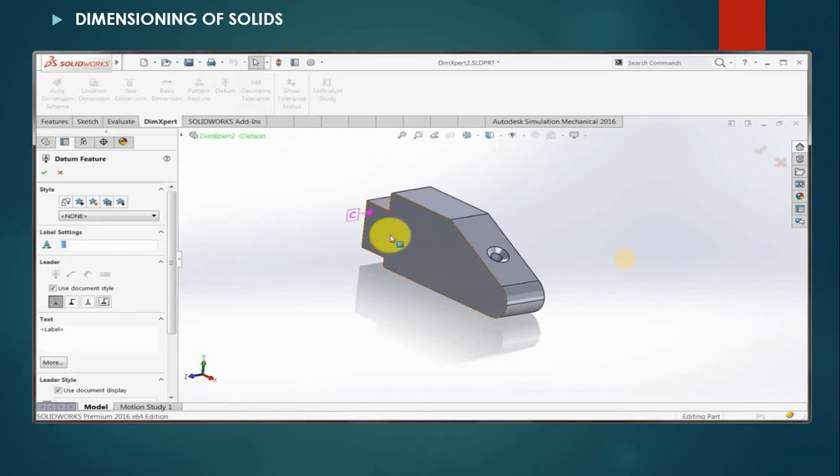What I'm going to do is add some dimensions and features here. I'll start with the size dimension, because I'd like to extract the size of this hole. Before I do that, I'm going to lay out a couple of datums. I know this is going to be my datum page, so I'll place that in there — you can see it's C, I should have changed it but I'll go back and change it. And I'm going to make the top face here — let's just make it B.

I'm going to make the bottom face be my B datum. So we'll change that, and I'm going to update the C here. I'm just going to click it and go into the properties. I'm going to press A, and we can see it.

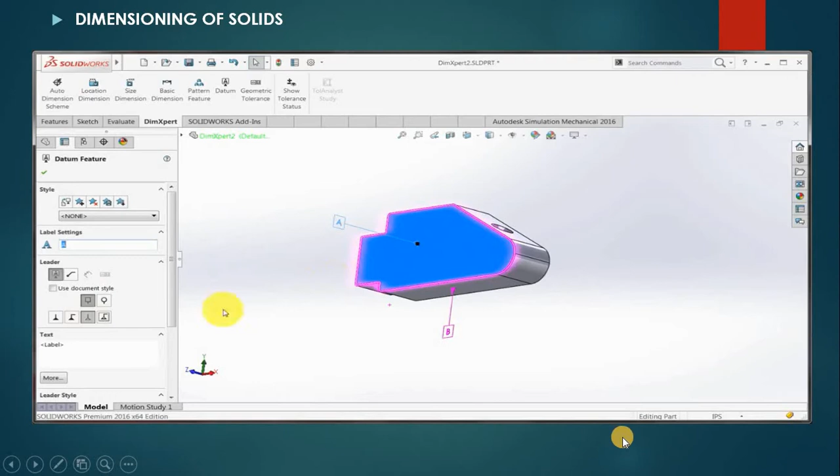Notice I do have some options here. I can adjust the label, I can use the style here. I'm going to do a triangle type leader there. So there are some different options to choose from as I'm placing it.

Now that I've got my datums identified, I'm going to go to my size dimension here. I'm going to select this hole. It doesn't really matter where I select it, but it's actually extracting out information about it. It recognizes the hole, applies my default tolerances, and you can see it's gone through and applied it.

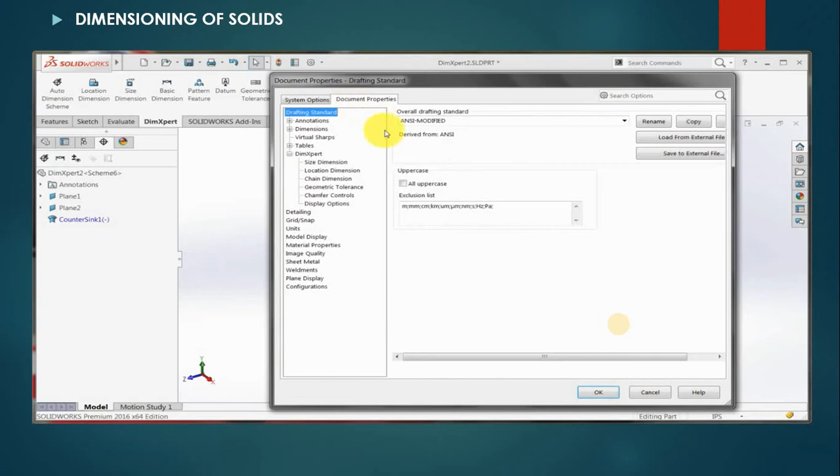Now let's just delete that - I selected it and hit the delete key. I'm going to go into the tools, then options, and switch over to document properties. I'm going to go to DimXpert, and you can see right now it's set up as block tolerance. I can also do it as a general tolerance by default, so you can see how I can change those default methods for when I apply my dimensions.

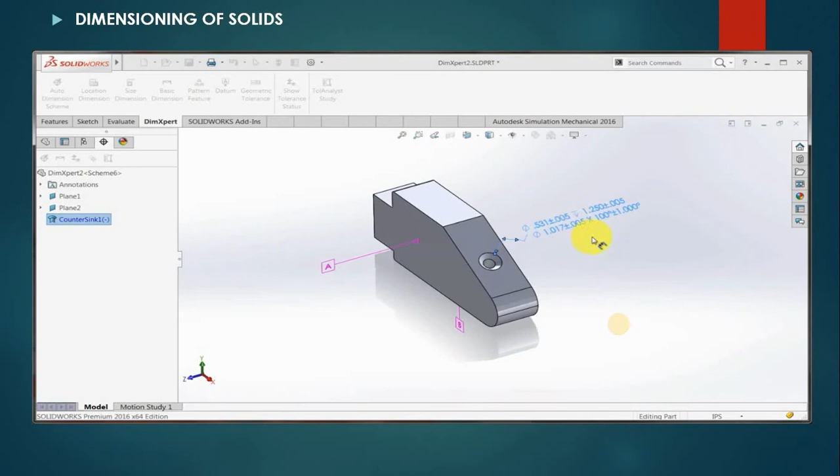Again, I can do my size dimension here, and base that to the model - that's a size dimension. I want to pull out the size of this fillet here, and it is round. Notice the function applies that, and it automatically recognizes that there's actually two the same here, so it's gone through and said there's times 2 here.

If I scroll down here, there's actually a part where I can turn that off - whether to include that instance count information, how many there are. You can go in there and change that. It doesn't change where this is located. Maybe I want this to be after, so I'll go times 2 after, or something like that. You can change that there.

Also notice how I can add other information, and change the overrides and the style of tolerance. So maybe this is symmetrical in this case - I want to have a max style, so I set my max. Okay, so that's the size dimension options.

I'm going to continue on here and place in a location dimension. But what I want to do is actually dimension to the theoretical intersection here. So let's look at this feature toolbar up here, and I want to go to the intersection one.

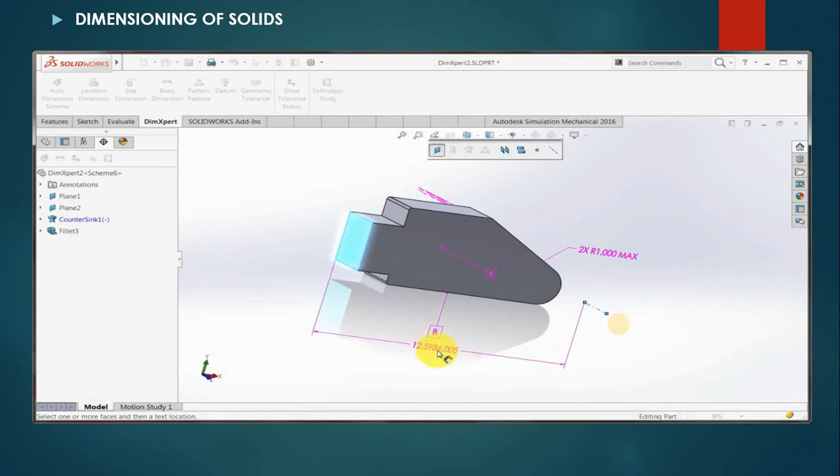So there's my face 1. I'm going to pick the bottom face here, and click OK, and it's actually generated an axis for me. Now I can use that axis to dimensionally locate that face, and we can see that it's pulling out that dimension.

I just want to make sure I have both faces dimensioned. So I'm just going to hold down the shift key and select both of these dimensions, right click on it, and do a combine dimension. Now you can see that it's times 2, which is actually 2 faces there.

So, I don't really want to show it as 2 dimensions. I'm just going to come down to my drop down here and turn off the instance to locate that.

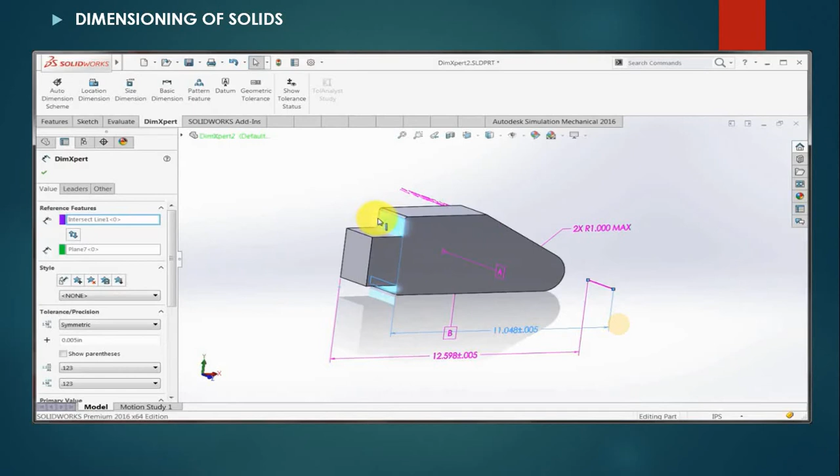Now, kind of a problem - not really a problem, but we can see that this dimension is in the front and this dimension is in the back. So I'm just going to take this dimension, drag it, and snap it to the back edge there. Now we can see it's dimensioning to the back face, so they're both in the same plane. Maybe I'll drag this one down there just to change the location of that.

So I can take this and actually change where that dimension is given - I'm going to change the plane. Obviously I might want to flip these around - oh, there we go. So you can see that I was able to drag those to the back to change the location.

Now if I wanted this dimension to actually be in a different plane, I can right click on it and use this to change the view that it's on - come in here and change how I want that to be. So maybe I prefer to see that from the top, but notice that the right click menu gives me an option to change that. So I'll actually do that because I want to move that dimension so you can see it.

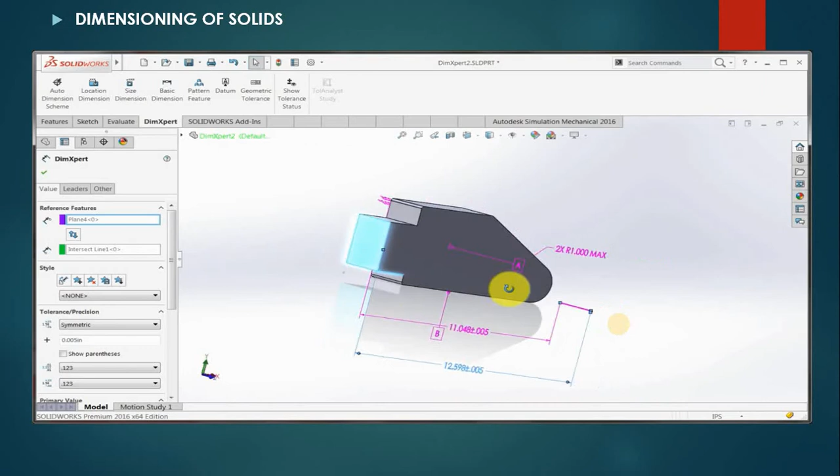So it's back to the back there. Again, we'll take that, drop that. Okay, I'm starting to dimension along here. Everything's starting to look good. I just want to do a quick check to see how I'm doing.

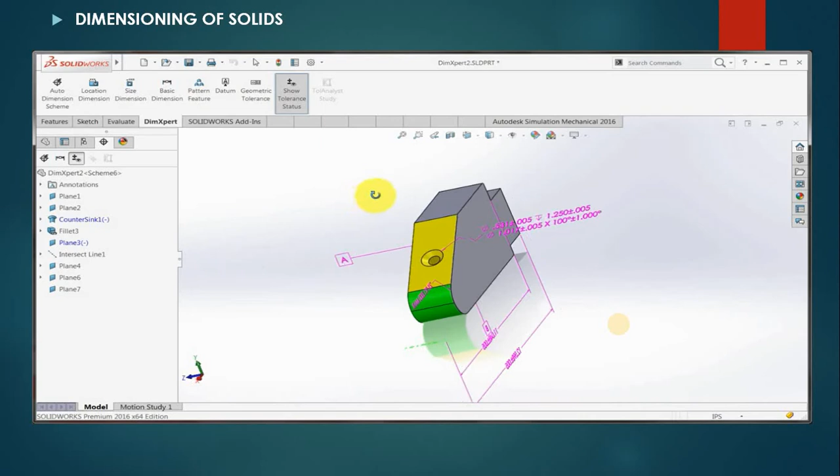Let's come over here. I'm just going to pick my show tolerance status. What it's showing me here is that the green is defined, but the yellow is missing information. So you can see how I've started to define some of the features, but there's some things that are actually missing. What I'd like to do is a location dimension, because I'd like to locate the position of this hole and locate it from the edge. Notice that there's no edge there.

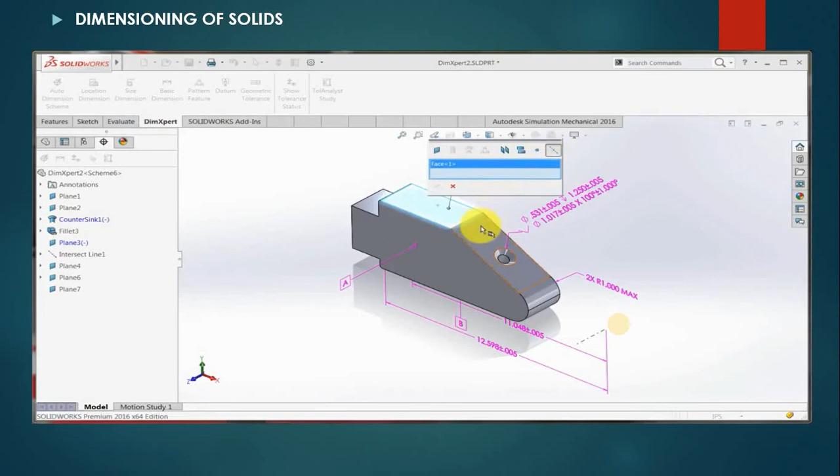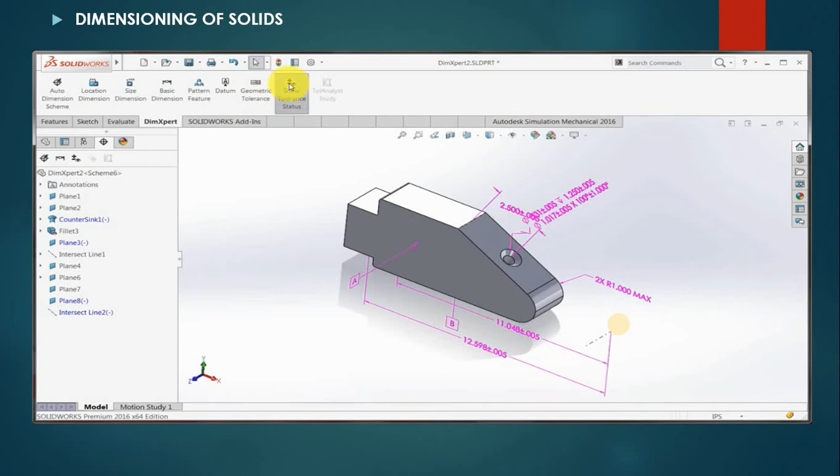So what I'm going to do is a location dimension again. I'm actually going to go to the intersection of those two faces, and dimension that hole and pull out that dimension value to relocate that dimension. See how it's located that dimension. There's one, for example, I probably want to change the plane where that's on. So the idea is that I would continue on dimensioning, and anytime I need, I can go in there and check to see if the features are fully dimensioned, under dimensioned, or over constrained, so I can continue working on that.

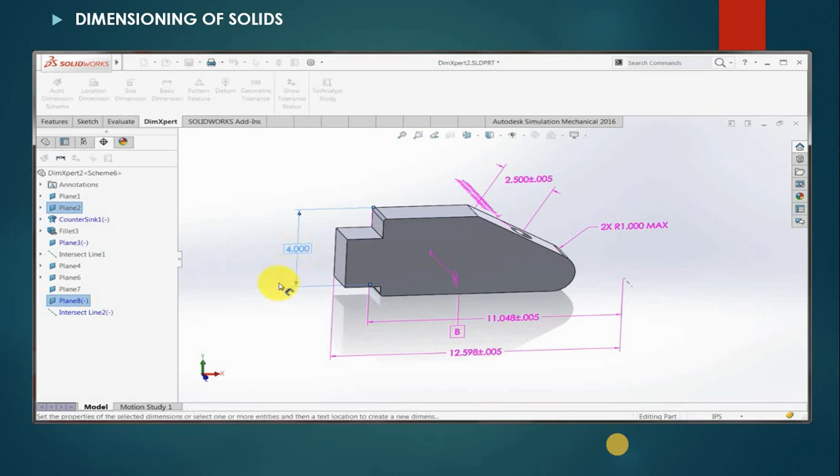Now what I'd like to do is create a basic dimension from that face to that face, and we can see that it's gone through and placed that dimension. So now a basic dimension, because the tolerance type is called basic, so it's also theoretical, as I like.

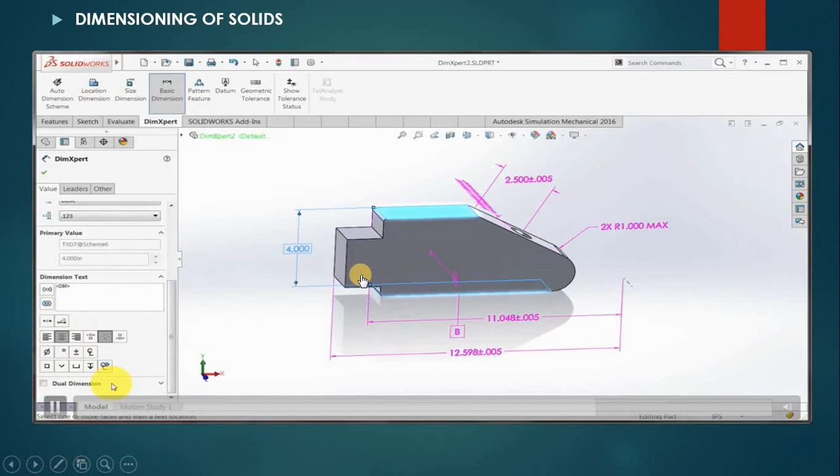You see in there, and notice the same options for controlling the properties and text. So I could add additional information if I wanted to. I could change the style, the reference dimension, the inspection dimension if I want. Change it to a leader by clicking on it, and that applies whether it's basic dimension, a size dimension, or location dimension. Okay, well that's a good start.

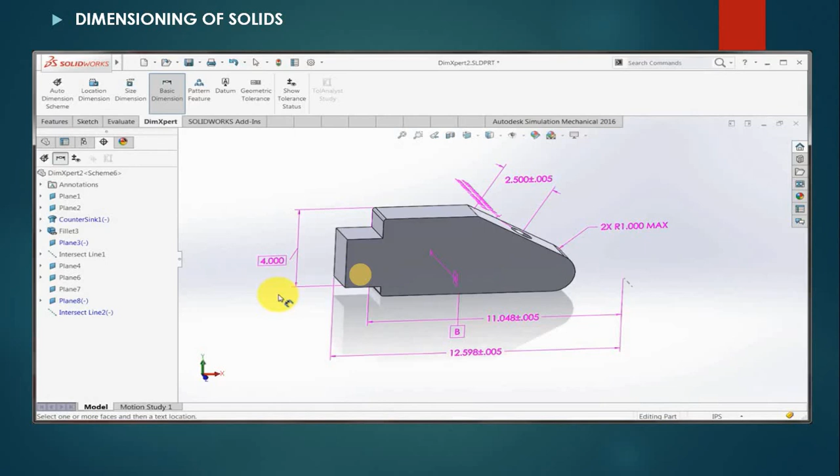I've got some dimensions, I've got my datums identified. What I'd like to do is create a geometrical tolerance. So very similar to how we apply dimensions, you can click geometric tolerance and the dialog box comes up. What I'm going to do is define what I want my geometric tolerance to be. So what I'd like to have here is maybe...

Angularity. There's my tolerance. Maybe I'd like to have this to the least material condition. Maybe my tolerance here is not quite that much. We'll do that. And the primary, in this case, is going to be to datum B. So I was able to define what the geometric tolerance needs to include. I will pick the face and then pick the location, and you can see how it's abstracted and placed everything.

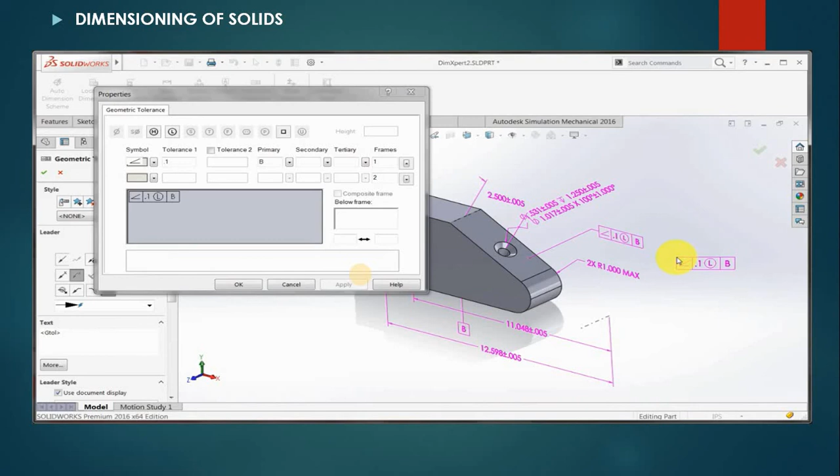So just like a dimension, just like datums, you can easily go in there and change that. By selecting it, notice that again I get different properties. So I'll change the style of leader on there, maybe perpendicular leader instead. You can see how I can change a lot of information, the style and the properties, how that looks. So you have the document properties. You can also override it on a per tolerance basis.

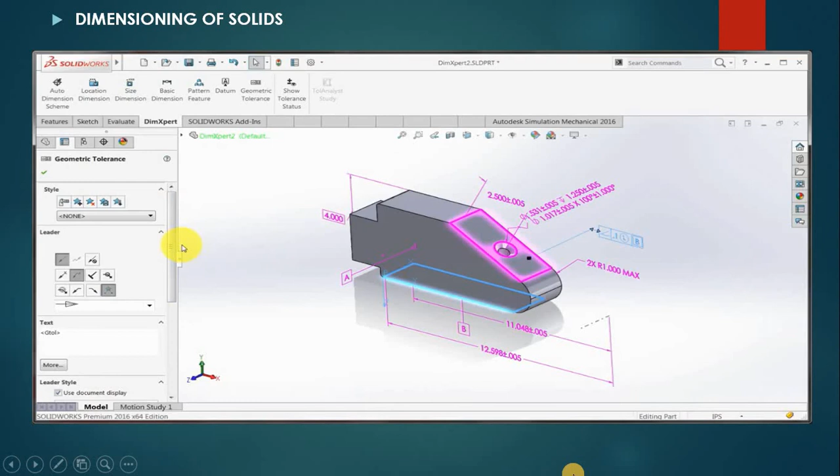Maybe we'll do one more here. Maybe I'd like to do geometric tolerance, and I'd like to set this to the profile of the surface. There's my tolerance. I'd like to do this to datum A. In this case, I'll do this to maximum material condition. I'll put the space there. I will pick the location, and I'll click OK.

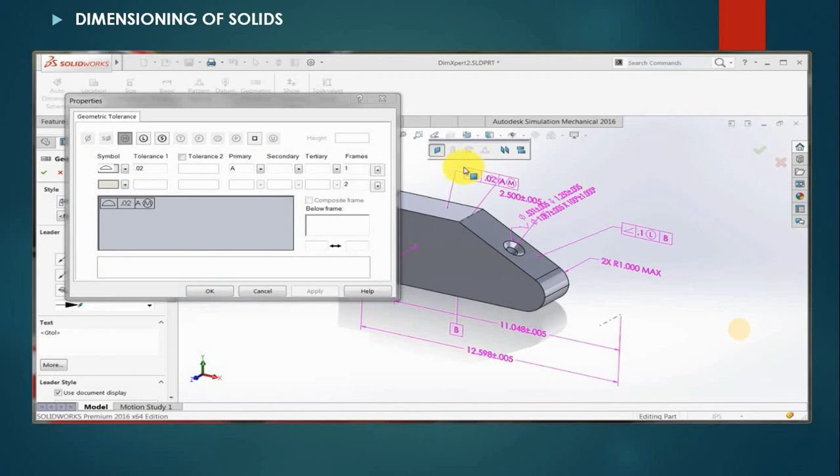And you can see that's moving around a little bit so you can see them. You can see I was able to.